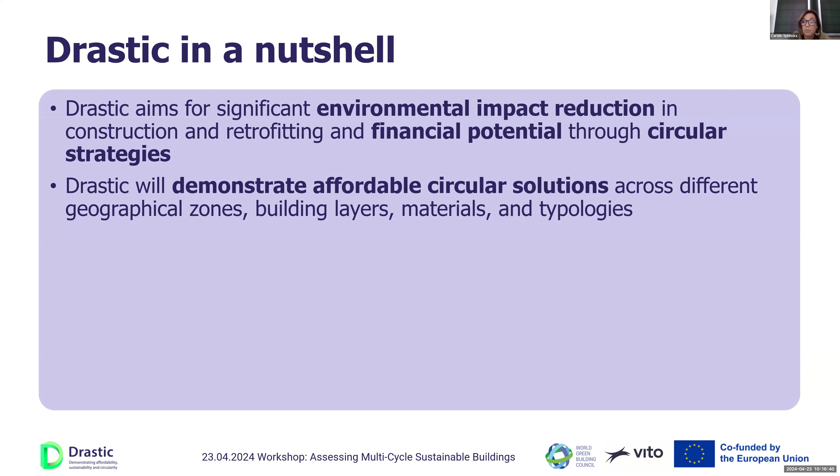So we have 5 demonstrators, and I will show them in a minute. We will show you that these circular solutions are leading to a reduced environmental impact and that they are also affordable. We will show that in different geographical zones, different building layers. We also consider different materials and different building typologies.

And importantly, that's why this workshop is really focusing on, is that to do this evaluation, to see if we are taking the right decisions from a sustainability point of view, we want to go beyond the more current state of play with regard to life cycle assessment, life cycle costing, sustainability assessments. We consider these current states of play as too linear. We want to include more the different circles, and that's why we want to develop in Drastic a multi-cyclic guidance and performance assessment framework.

Important also is that we want to go away from manual work, so we want to make life easier for all actors, all stakeholders. So we will develop a common digital platform where different digital tools are connected, tools that can help you in traceability, tools that can help you do the assessments, the environmental assessments, the socio-economic assessments, etc.

And then finally, this Drastic project really aligns with European objectives to move to more sustainable buildings, and to also make sure that the solutions we will demonstrate will increase market uptake. It's important to show that these innovative technologies can work in reality, that these new business models can really gain positive impacts.

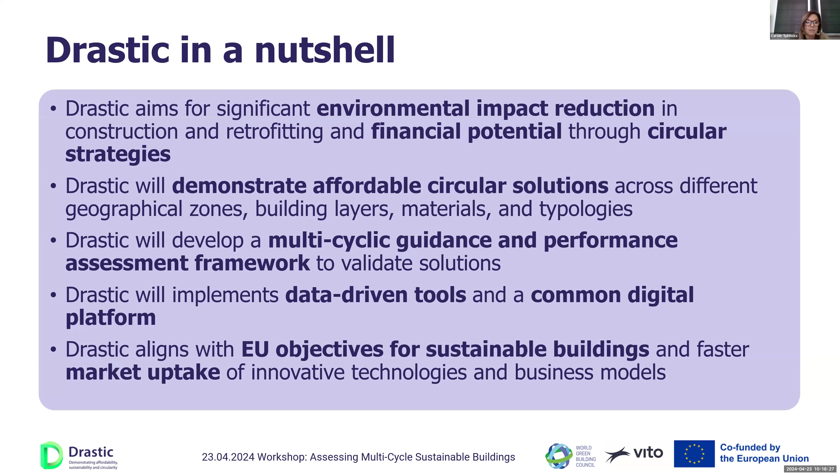Five demonstrators. We don't have time to show all the details, so in a nutshell: the first one is located in Norway, where the focus will be on reclaimed wood, structural wood that will be reused and recycled.

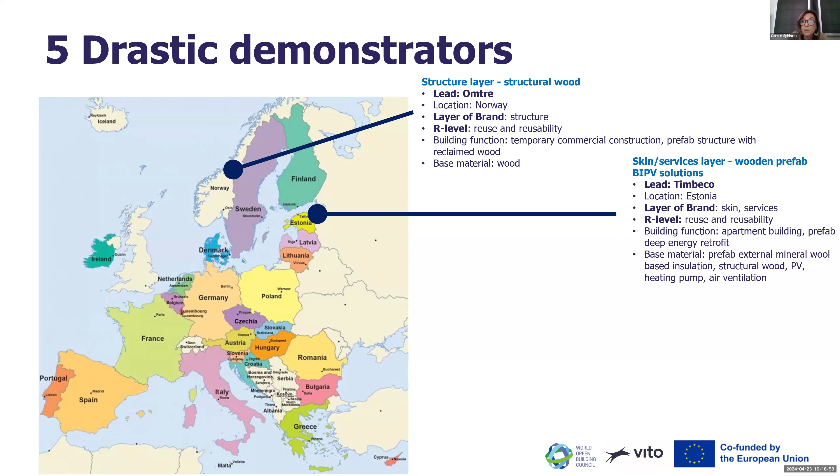The second one is in Estonia, led by Timbeco, focusing on wooden prefab elements combined with BIPV solutions. The third is in Germany, led by Weber, focusing on circular insulation packages. The fourth is in France, led by Saint-Gobain, showing circular use of ceiling plates and indoor partitioning walls.

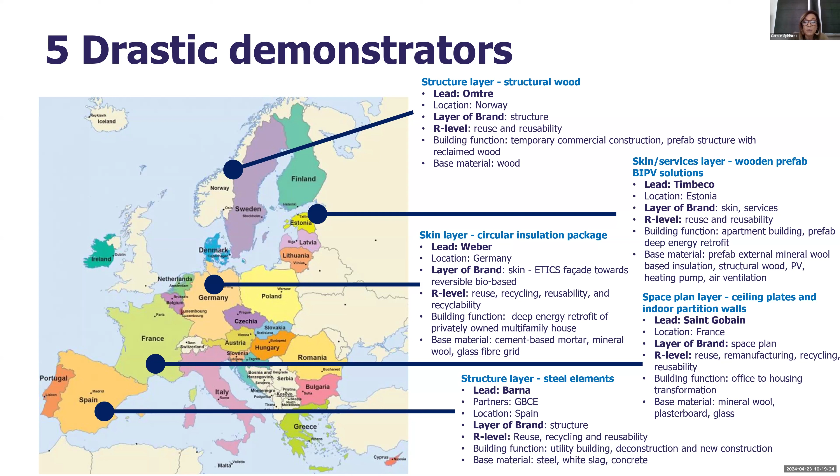And the last one is in Spain, where it is about reusing steel elements.

How are we organized? There are specific objectives we want to meet. We want to guide with Drastic the development of these circular innovative solutions, enable their rollout and replication, facilitate implementation, ensure market uptake, and build awareness, all to meet some expected outcomes.

To meet these specific objectives together with the expected outcomes, we've organized ourselves into 6 main work packages. The first is project management and coordination, led by Vito. The second, also led by Vito, is to develop this multi-cyclic guidance and performance assessment framework.

And that's actually the core of this workshop today. The third work package is where the demonstrators take place — each demonstrator will first do a circular product development and demonstrate it at the building level. That work package is led by Saint-Gobain.

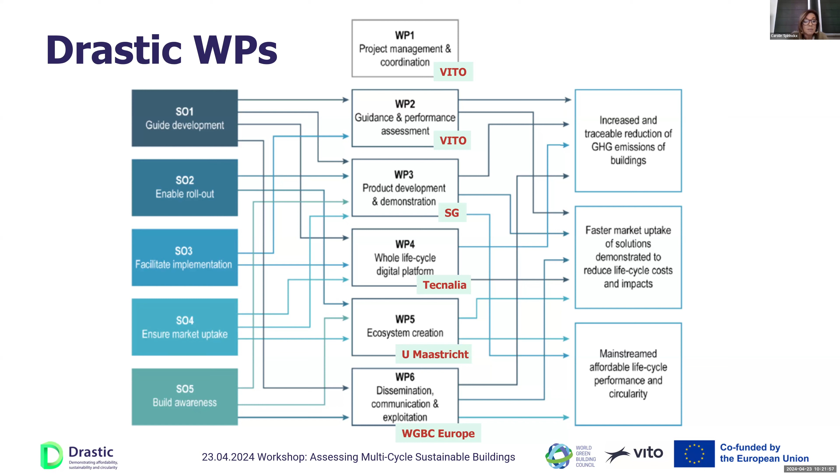And then finally, work package 6, led by the World Green Building Council, Laura and her team, is about dissemination, communication, and exploitation. That's pretty much in a nutshell.

I'm happy that we have this workshop today, where we'd like to introduce this guidance and performance assessment framework. As I explained, we want to go beyond current ways of assessing environmental and economic performance. We want to include strategies related to circularity and sufficiency into these frameworks, ending with a multi-cyclic life cycle assessment framework and a multi-cyclic life cycle costing framework, ideally already including circularity and sufficiency aspects.

If it's not possible to include them directly, we'd like to develop additional methodologies or additional KPIs with regard to circularity and sufficiency — and your input will be really valuable. This is the first time we'll explain the state of play with this new guidance and performance assessment framework, but we're looking forward to your feedback to make a shared framework where all your input is valuable. That's all in a nutshell.

I will hand over now to, I think, Wai Chung. You will introduce the participants to the goal of this workshop.

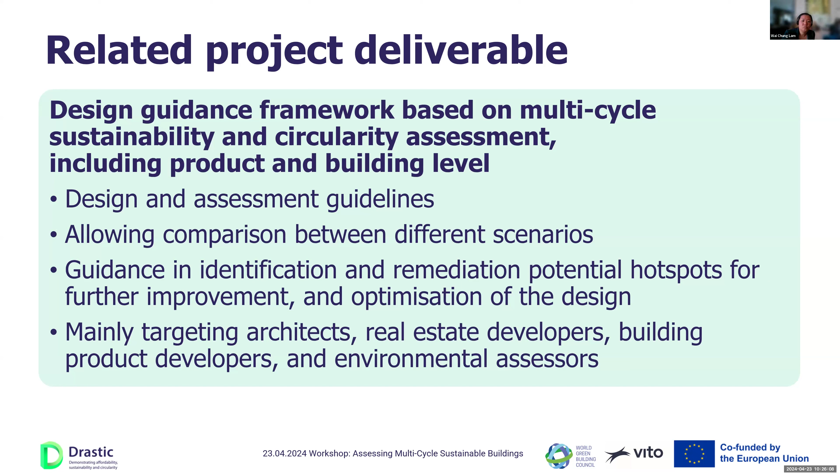Then briefly on the state of the art, so some general considerations.

One, as already mentioned, we noticed that linear LCA and LCC is common practice. LCA according to the EN 15804 A2 for construction products is implemented a lot currently by product developers. There are a lot of European programs on EPD systems, and recently with the revision of the CPR, the Construction Product Regulation, we know that from 2025 it's mandatory to declare the global warming potential based on LCA of the EN 15804. By 2029, even all core impact categories of the EN 15804 need to be declared in the declaration of performance of a product. And I think in 2035, even the additional impact categories need to be declared.

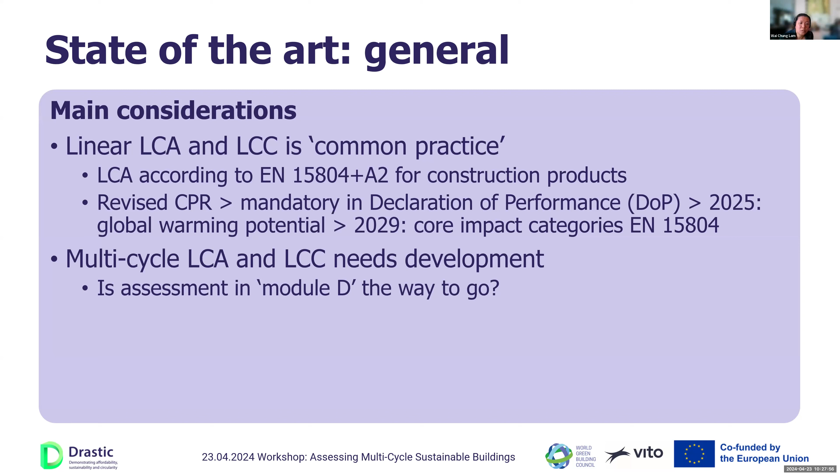We also notice that multi-cyclic LCA and LCC still need development, but the question that we have, and maybe you also have, is: is module D the way to go? There are some merits on module D, and we'd like to discuss this with you in one of the breakout rooms. We also notice that multi-cycle effects depend on different factors: the level of circularity, the level of sufficiency, resilience, and different kinds of scenarios.

If you assume a different scenario, you will get different results, of course. We also notice that current focus is on the lower R levels, like recycling, which have relatively low environmental benefits.

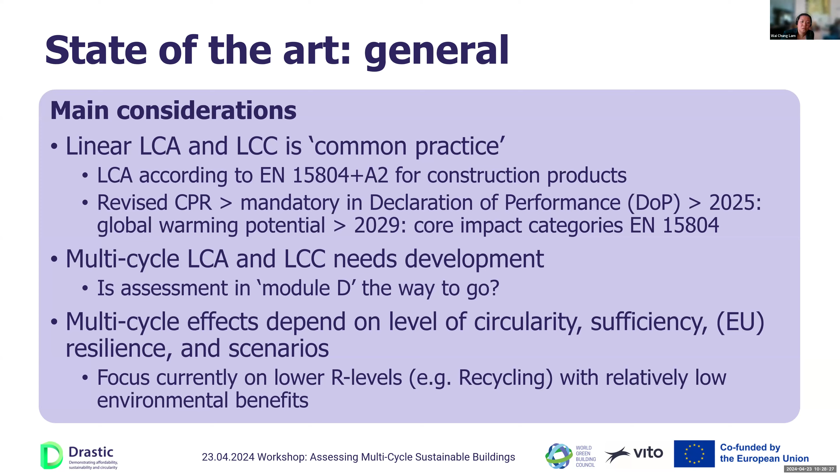Then a slide on the state of the art regarding the LCA. So the current state, as mentioned, is a single cycle linear LCA. There are different end-of-life allocation methods, like the method within the EN 15804 where you have the 100-0 allocation, but also the PEF allocation with different division of percentages within the circular footprint formula. There's a variety of scenarios, specifically in the use stage, but also in the demolition stage and module C. Sometimes we get quite some questions from manufacturers on how to declare module C—it's often a difficult one.

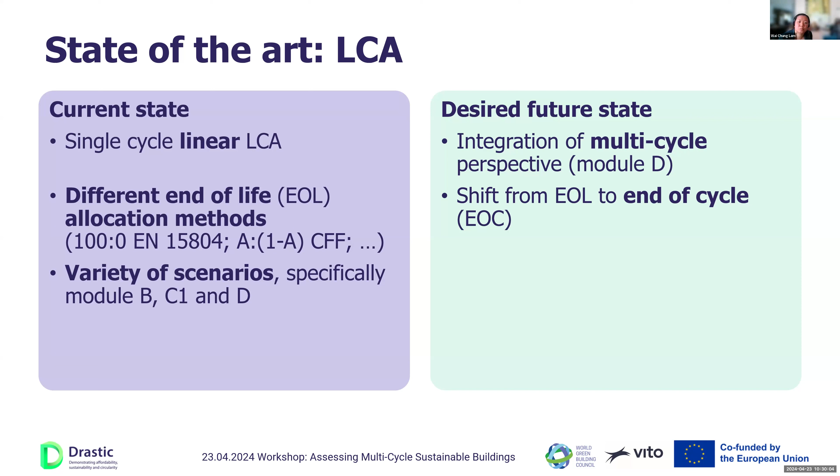Regarding the desired future state, what we see is to integrate a multi-cycle perspective, preferably within module D somehow, if we want to stick to the EN 15804, as it's already commonly used, and also with respect to the CPR revision making it mandatory to declare according to the EN 15804. We would like to shift from end of life to end of cycle—that's a way we see as a possibility to have that multi-cycle perspective integrated. Preferably we would like to align the scenarios to assess per assessment level, the different scenarios, so it's easier for non-LCA practitioners to read the different scenarios and what is declared within an EPD.

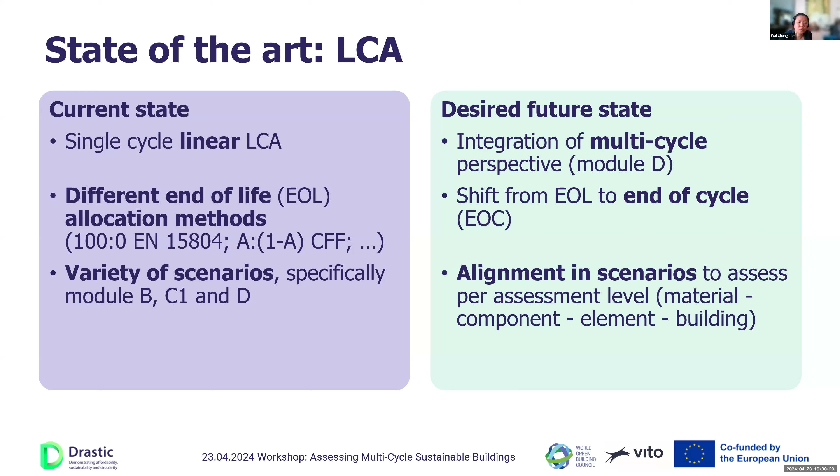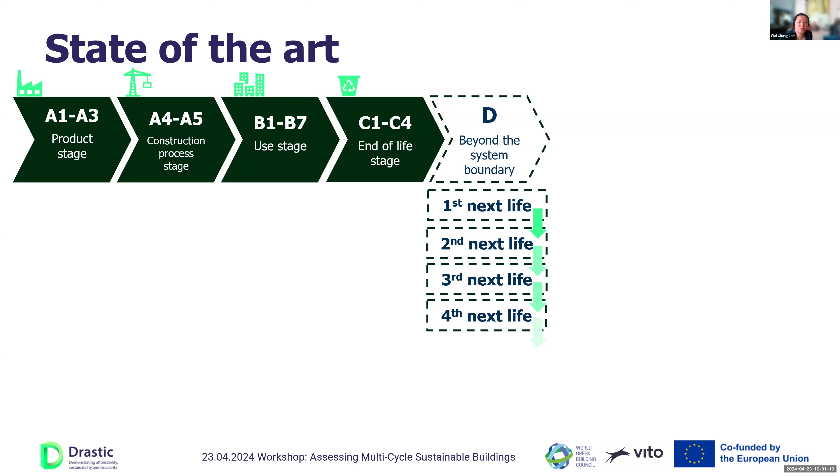We also visualized a bit on the state of the art. You have the different life cycle stages of information modules according to the EN 15804: you have the A, the B, the C, and the D. Currently in module D, it's mainly focusing on the first next life cycle. In order to have the multi-cycle perspective integrated, you should also include the second and the third and next life cycles in the assessment. You could link those life cycles to our circular economy strategies. As mentioned, currently the focus is mainly on recycling or maybe even remanufacturing, but that's on the lower level of the R ladder.

We see that we should shift from the lower levels to higher levels in order to gain sufficiency within the products. There are different strategies, different scenarios to apply to get to those strategies in the different life cycle stages.

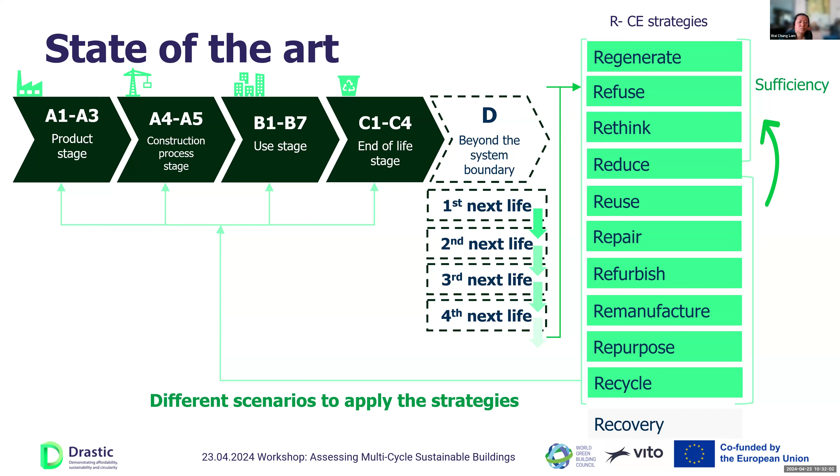So indeed, as you just showed in the slide before, we see that the higher levels of sufficiency can be achieved with also higher levels of our strategies.

So what do we mean when we talk about sufficiency? We start with a working definition based on Yamina Saheb and the IPCC report, as strategies that avoid demand for energy, materials, land, and water, while delivering human well-being for all within planetary boundaries.

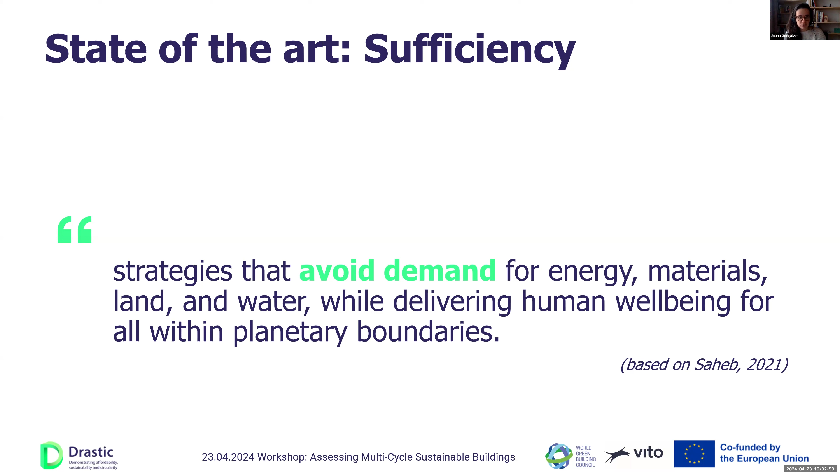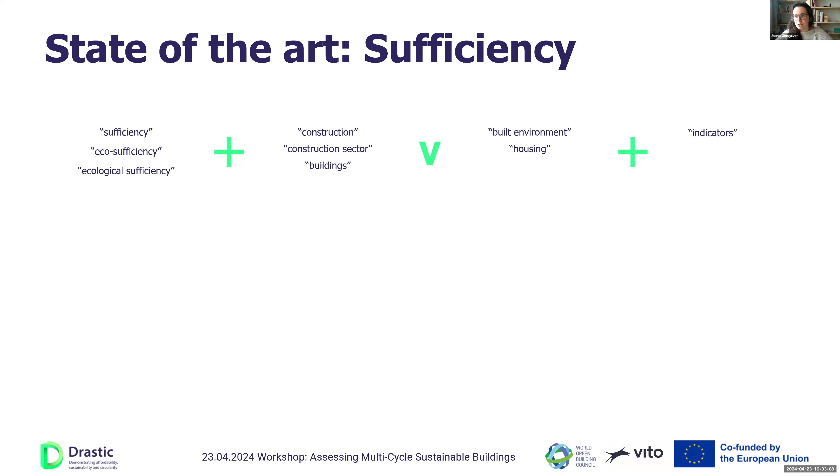But the question is, what does this mean for the built environment specifically? How can we guide built environment solutions that avoid this demand for resources? So what we did was a literature review, looking for sufficiency specifically in the context of construction and the built environment, together with indicators that would allow us to guide the solutions.

So the question that we bring today to this workshop and that we would like to discuss with you is which indicators can be used to guide higher levels of sufficiency at product and building level.

And here I would like to highlight the higher levels of sufficiency, because as you saw in the definition, sufficiency is avoiding demand. So in principle, we should avoid products in the first place, but that's not always possible. So what we want to achieve is, even if we have to produce something, even if we have to continue building, how can we do it at the higher level of sufficiency?

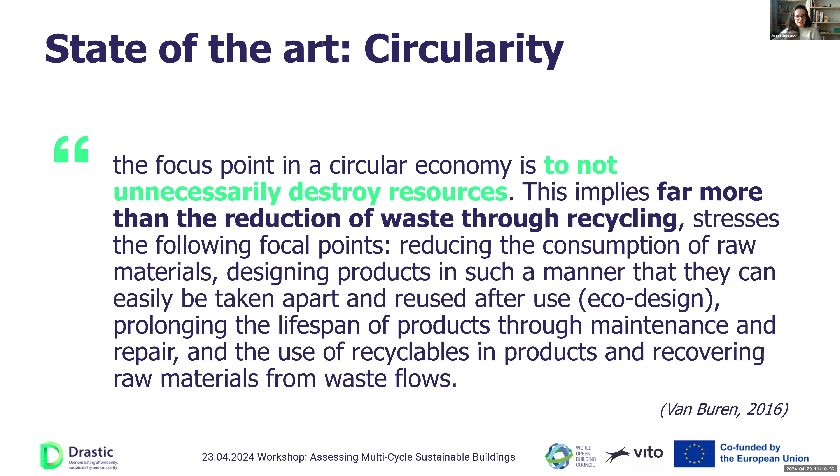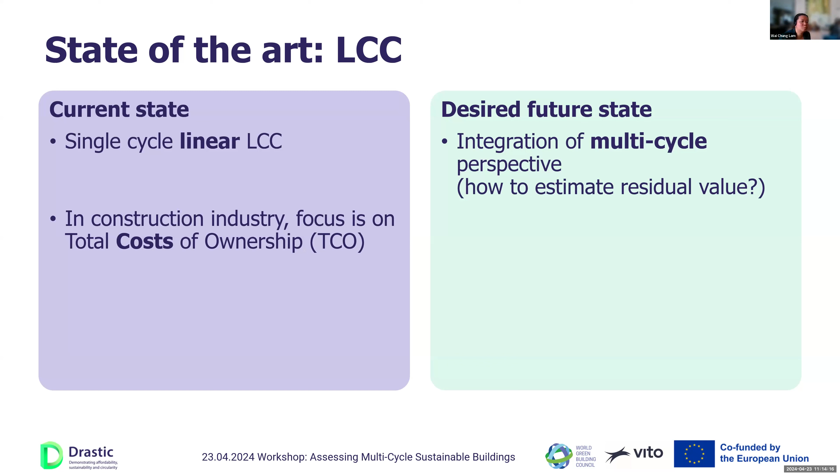Would we want to add external cost, but how would we deal with uncertainty of those external costs? That's often one of the comments on adding external costs, it increases the uncertainty of your results.

There's also a lack of consensus on the factors of external costing, and is linking to environmental impact pricing a way to go? For instance, carbon pricing is commonly applied. Would we like a pricing framework for all different environmental impacts that can be calculated with an LCA?

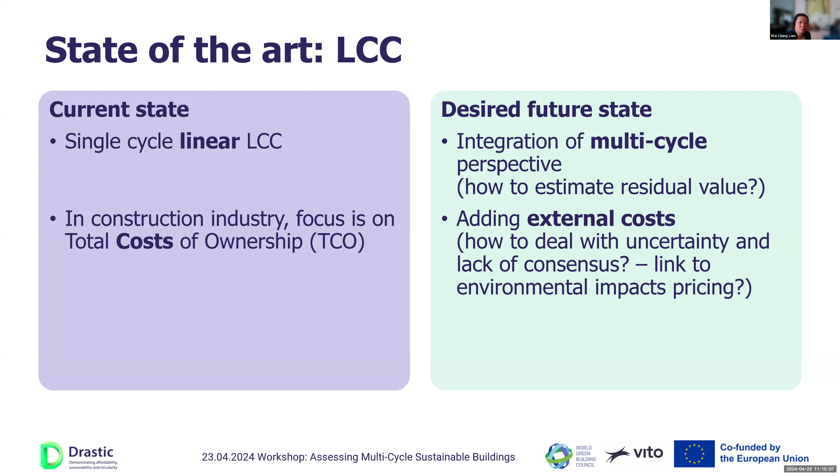So that's the content for the next breakout room rounds: a room on circularity indicators and a room on multi-cycle LCC.

Is everyone back? I think slowly, yes. I think all the other rooms should be closed, so you can continue with the slides. Is Joanna there? Yes, she is there. Yes, I'm here. I will share my screen.

Yeah, I don't have a slide prepared for the recap. Of course, I don't know beforehand what the discussions would be. I hope...

I can reflect a bit upon the LCA and LCC breakout sessions, and Joanna, you will do the sufficiency and circularity ones. Of course, we didn't have time in between to really make connections, but based on what I experienced in the breakout rooms, within the LCA it was easier to provide inputs on the questions we had. In the LCC session, we had quite similar questions like on the LCA, but it was more difficult to reflect upon it. There were some interesting ideas on how to develop the LCC framework.